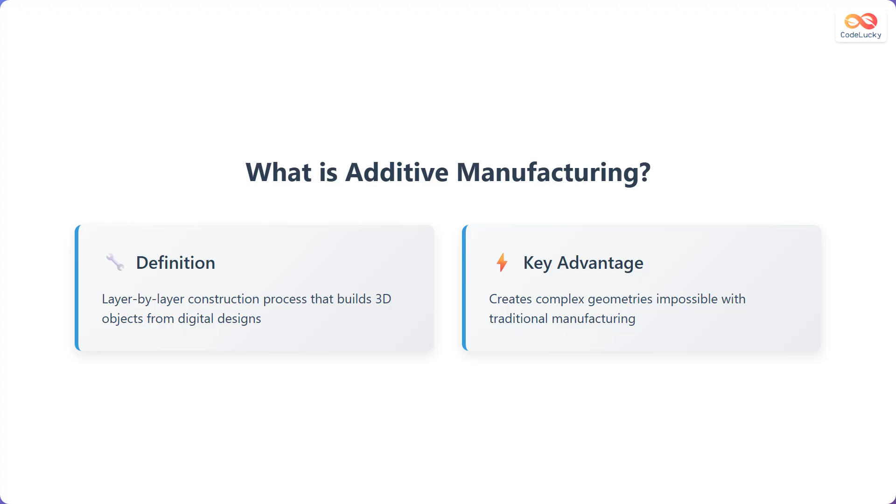The key advantage of this technology is its ability to create complex geometries that would be impossible or extremely expensive to produce using conventional manufacturing techniques. Think of internal channels, hollow structures, or intricate lattice patterns, all achievable through additive manufacturing. This layer-by-layer construction opens up entirely new possibilities in product design and functionality.

There are 4 major 3D printing technologies you should know. First is FDM or FFF, which stands for Fused Deposition Modeling or Fused Filament Fabrication. This is the most common type where plastic filament is heated and extruded layer by layer. Second is SLA and SLS: stereolithography uses liquid resin cured by light, while selective laser sintering uses powder materials fused

by laser energy. Third is SLM and EBM, selective laser melting and electron beam melting, both used for metal printing in aerospace and medical applications. Finally, PolyJet and MJF, material jetting and multi-jet fusion, which offer high precision and multiple material capabilities in a single print.

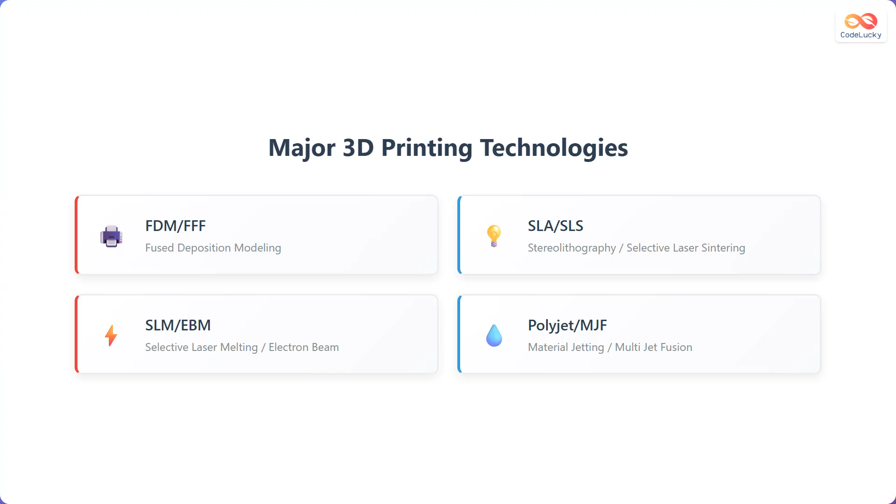Let's examine the FDM process in detail, since it's the most widely used technology. The process starts with filament being heated in the extruder to its melting point. The molten plastic is then deposited layer by layer through a precise nozzle movement. After each layer is completed, the build platform moves down by 1 layer height, typically 0.1 to 0.3 millimeters.

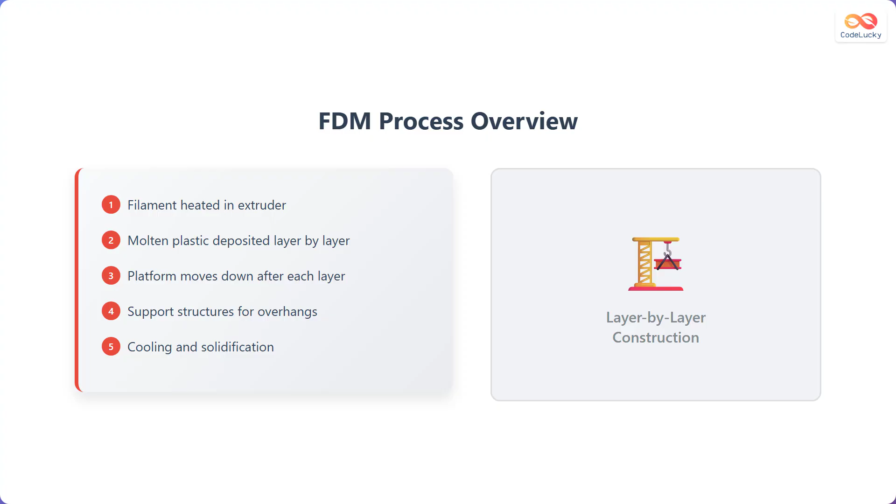For overhanging features, support structures are automatically generated to prevent drooping or collapse during printing. Finally, cooling and solidification occur as each layer bonds with the previous one. Understanding this step-by-step process is crucial because it directly impacts print quality, speed, and the types of geometries you can successfully create.

3D printing materials fall into 2 main categories. Thermoplastics are the most common, including PLA or polylactic acid, which is biodegradable and easy to print with, making it perfect for beginners. ABS or acrylonitrile butadiene styrene offers higher strength and temperature resistance. PETG or polyethylene terephthalate glycol combines ease of printing with chemical resistance. Nylon provides engineering-grade strength for functional parts.

Advanced materials open up industrial applications. Metal powders like titanium, aluminum, and steel are used in aerospace and medical implants. Ceramics such as alumina and zirconia offer high-temperature resistance. Carbon fiber composites provide exceptional strength-to-weight ratios, while UV-curable resins enable highly detailed prints with smooth surface finishes.

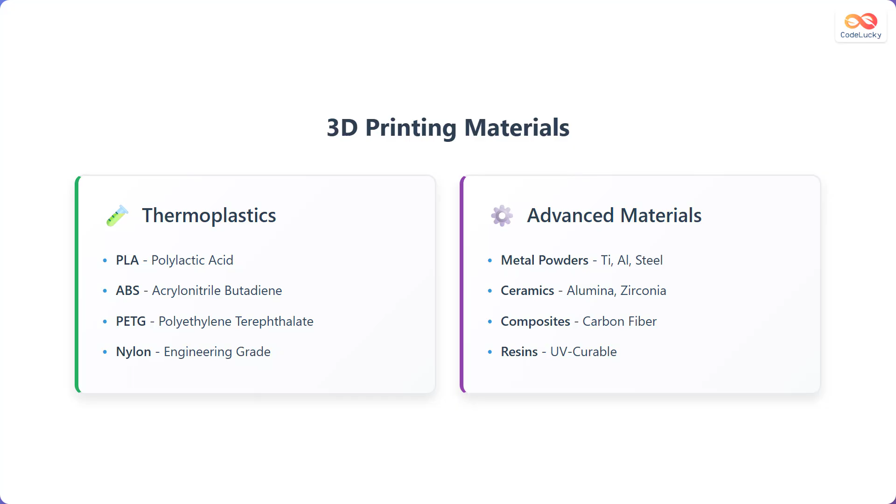Design for manufacturing, or DFM, is critical for successful 3D printing. 4 key principles guide effective design. First, minimize overhangs and support structures by designing parts that can print without extensive supports, reducing material waste and post-processing time. Second, design appropriate wall thickness. Too thin walls may not print properly, while overly thick walls waste material and increase print time.

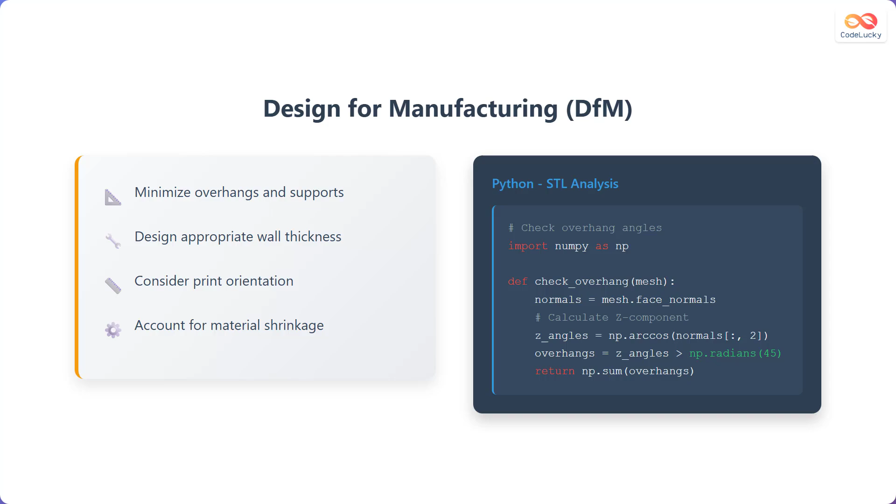Third, consider print orientation carefully, as the direction you orient your part affects surface finish, strength, and support requirements. Fourth, account for material shrinkage and thermal effects that can cause warping or dimensional inaccuracy. Here's a simple Python example for checking overhang angles. By calculating the z-component of face normals, we can identify surfaces that exceed the critical 45-degree angle and may require support structures.

Support structures are temporary scaffolding used during printing. They're needed for overhangs greater than 45 degrees, bridges longer than 5 millimeters, complex internal cavities, and horizontal holes or slots. There are several types and strategies to consider.

Tree supports use less material and are easier to remove, making them ideal for organic shapes. Grid supports provide a strong foundation for large flat overhangs. Soluble supports using materials like PVA or HIPS can be dissolved away, leaving perfect surface finishes on complex geometries.

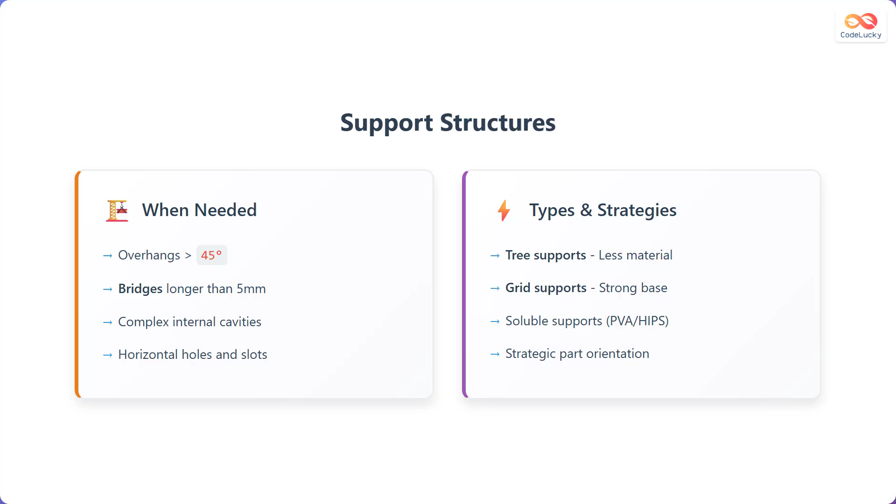Sometimes, the best strategy is strategic part orientation, rotating your design to minimize or eliminate the need for supports entirely. Understanding when and how to use supports effectively can dramatically improve your print success rate and surface quality.

Several critical parameters control print quality and success. Nozzle temperature typically ranges from 180 to 260 degrees Celsius. Depending on the material, PLA prints around 200 degrees, while ABS requires around 240 degrees. Bed temperature ranges from 50 to 110 degrees Celsius and prevents warping by maintaining adhesion during cooling.

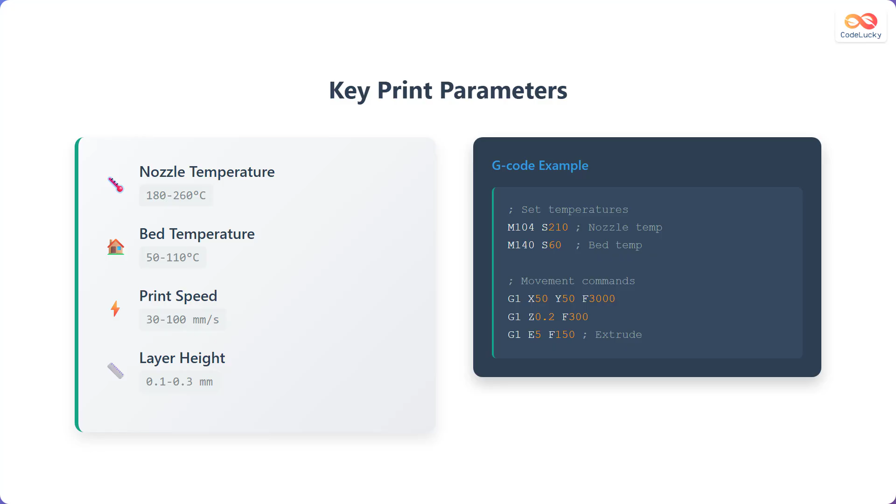Print speed affects quality and print time, typically ranging from 30 to 100 millimeters per second. Slower speeds generally produce better quality. Layer height determines surface smoothness and print resolution, ranging from 0.1 to 0.3 millimeters. Here's a G-code example showing how these parameters are controlled. M104 sets nozzle temperature, M140 sets bed temperature, and G1 commands control movement speed and extrusion rates.

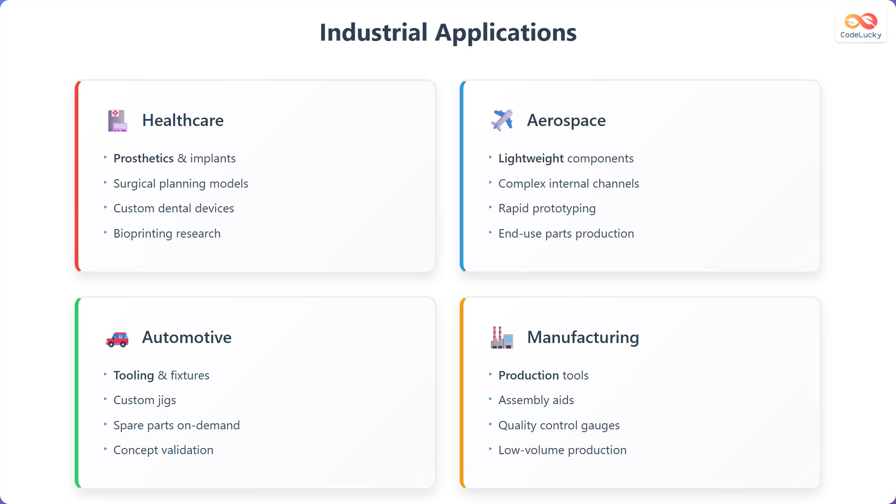General manufacturing benefits from production tools, assembly aids that improve worker efficiency, quality control gauges, and low-volume production runs that would be uneconomical with traditional manufacturing.

Let's examine 2 frequently asked interview questions. First, what factors affect print quality in FDM technology? The answer includes temperature control for both nozzle and bed, proper layer adhesion achieved through optimal settings, appropriate print speed that balances quality and efficiency, correct retraction settings to prevent stringing, and effective cooling management to prevent warping and improve surface finish.

Second, how do you minimize warping in ABS prints? The solution involves using a heated bed at 90 to 110 degrees Celsius, maintaining an enclosed chamber to control ambient temperature, ensuring proper bed adhesion through techniques like using ABS slurry or specialized bed surfaces, and implementing controlled cooling rates to reduce thermal stress during the printing process.

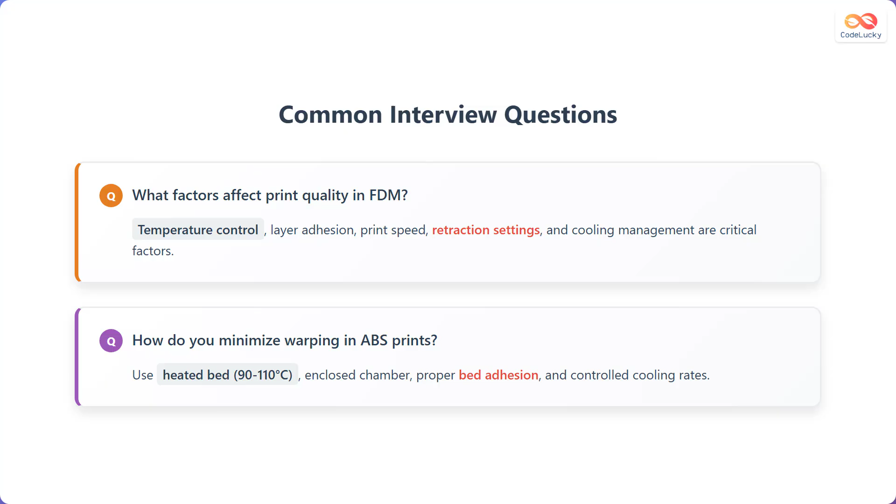3D printing faces several quality challenges that require systematic solutions. Common issues include layer adhesion problems, where layers don't bond properly, surface finish inconsistencies that affect part appearance, dimensional accuracy issues that prevent proper fit and function, material property variations between printed and bulk material, and extensive post-processing requirements that add time and cost.

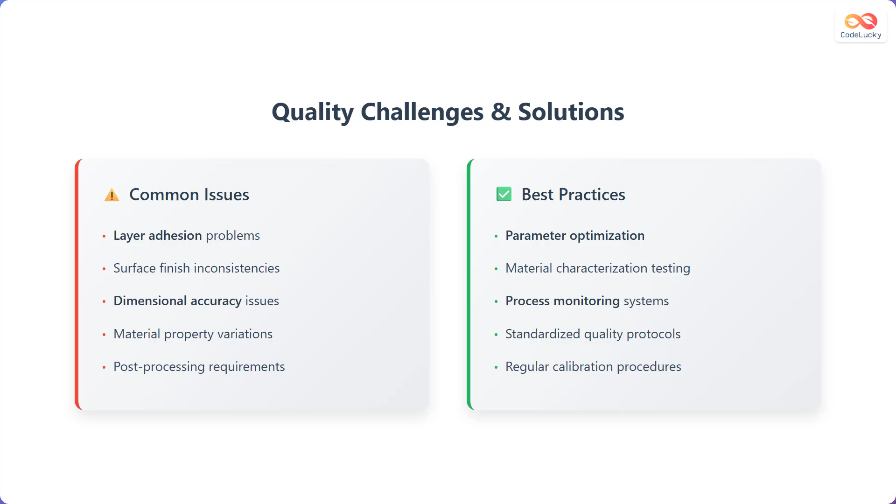Best practices to address these challenges include parameter optimization through systematic testing and calibration, material characterization testing to understand how materials behave during printing, process monitoring systems that detect issues in real time, standardized quality protocols that ensure consistent results, and regular calibration procedures to maintain machine accuracy. Implementing these practices transforms 3D printing from an art into a reliable manufacturing process.